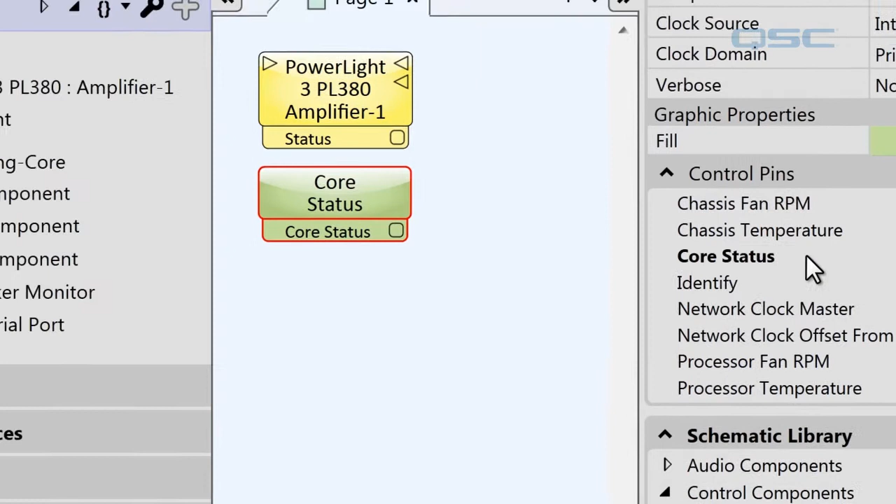For each of them, I'll go to the right side pane, look at the Control Pins window, and activate the Status Control Pin. Now, if you have more than one inventory item that you want to monitor, you may not want to set up a different emailer for every single one. Instead, let's go to the schematic library again, under Control Components, and bring in a status combiner into the schematic.

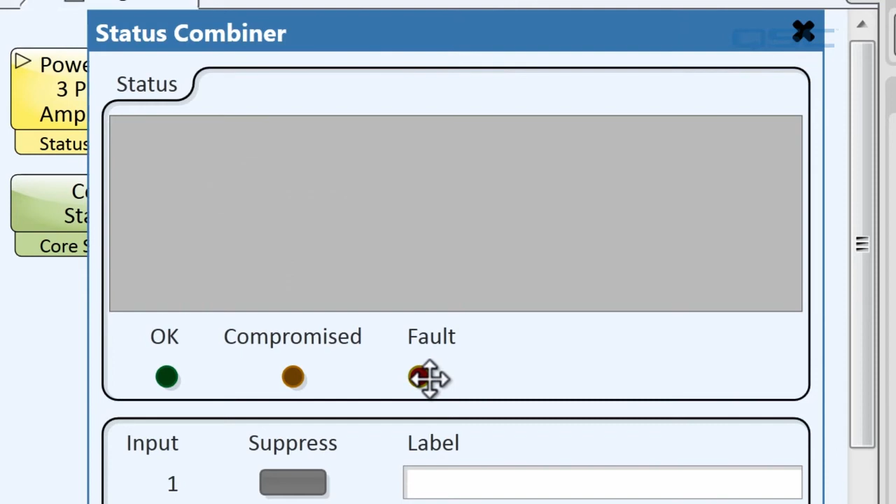You can wire the control pins of any inventory item's status to the status combiner, and it will compile them together to let you know if there's a problem with any of them. Now, if anything goes wrong, this fault LED will light up. Well, I want that LED to trigger the emailer. So let's go to the Control Pins window of the status combiner and activate the fault control pin. Next, we have to create a trigger.

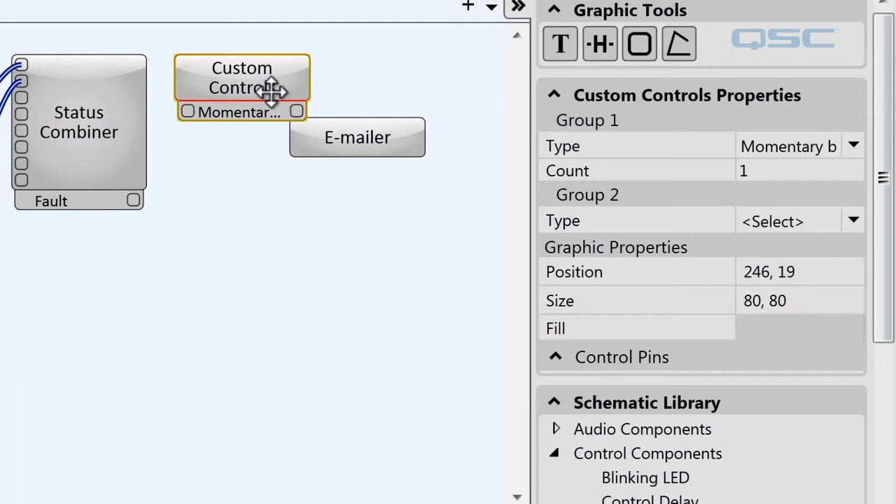So let's pull in a custom controls component, and we'll use it to create one momentary button. That means that the moment that this button is activated, it will send one impulse to whatever it's connected to. Wire the fault control pin to the momentary button. Now, when there's any fault in the system, this button will trigger.

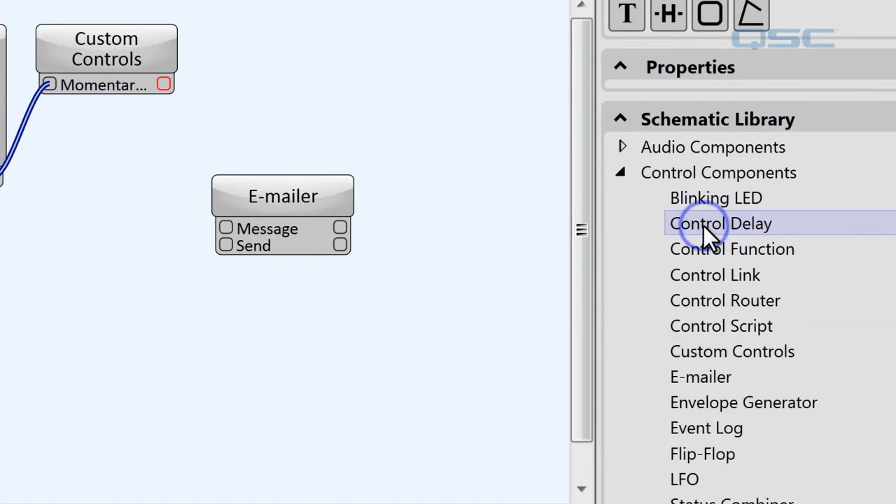Let's go to our emailer component and open up some of its control pins. We want to be able to control the send button, and we also want to edit the message that it sends. We'll wire the trigger from the momentary button to the send button, but before it gets there, I actually want to bring in a control delay, which simply adds a bit of time between when this button is triggered and when it actually fires.

You can adjust it anywhere between 0 and 10 seconds, and the reason I'm doing this is because I want to make sure there's enough time for the system to compile a log event of the failure, because that's what we'll use for the message of the email.

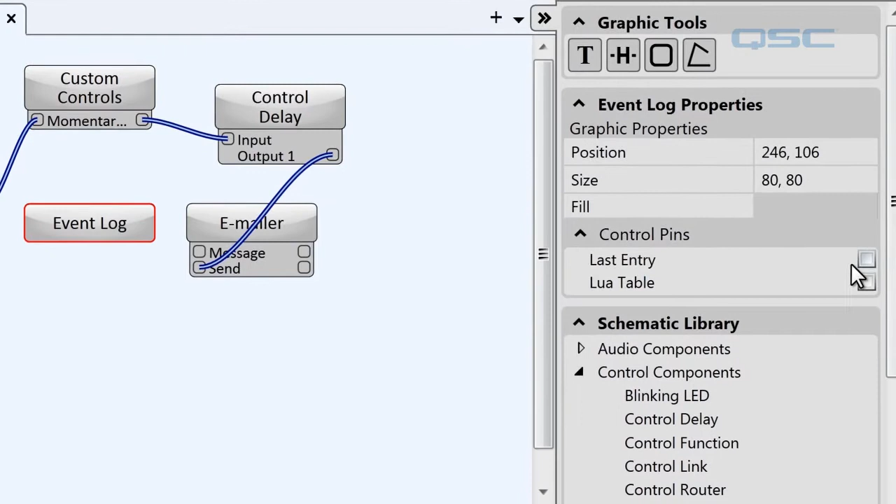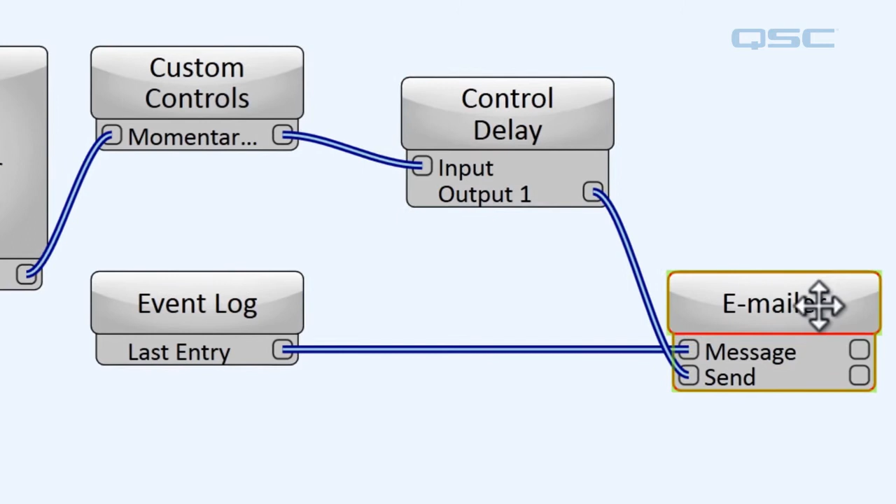Pull in the event log component from the schematic library and activate its last entry control pin. Wire this to the emailer message control pin, and it will use the last created log for the body of your email. If you're unfamiliar with the event log, refresh yourself with what it does by watching our administrator tutorial.

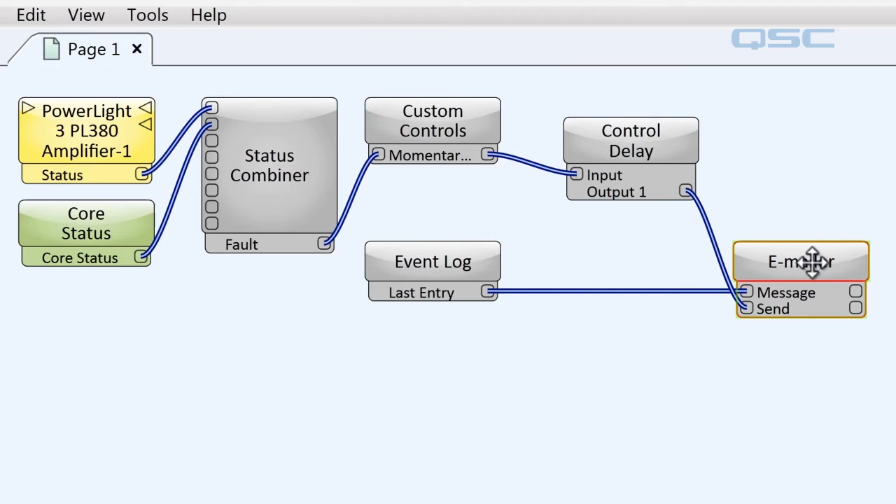So, let's review this entire chain. Your inventory items constantly send their status to a status combiner. If any of them are at a fault, the fault LED will send a signal to this momentary button, which, after a 5-second delay, triggers an email to be sent. The email consists of the last log entry of your event log, which should be the fault in your inventory, and it is sent to whoever you have established here in its control panel.

Let's see this in action. Now, the amplifier I added earlier doesn't actually exist. So when I run this to the core, it's going to report a fault for the status of that amplifier. Then, after 5 seconds, we'll see the emailer start to send its message, and here in my inbox, I'll find the error log. It's just that simple.

We've also built our own customized messages, which are then fed to the message field of the emailer rather than using the last event log. Now feel free to download this project file from qsctraining.com if you want to get a closer look at how we scripted this to work.

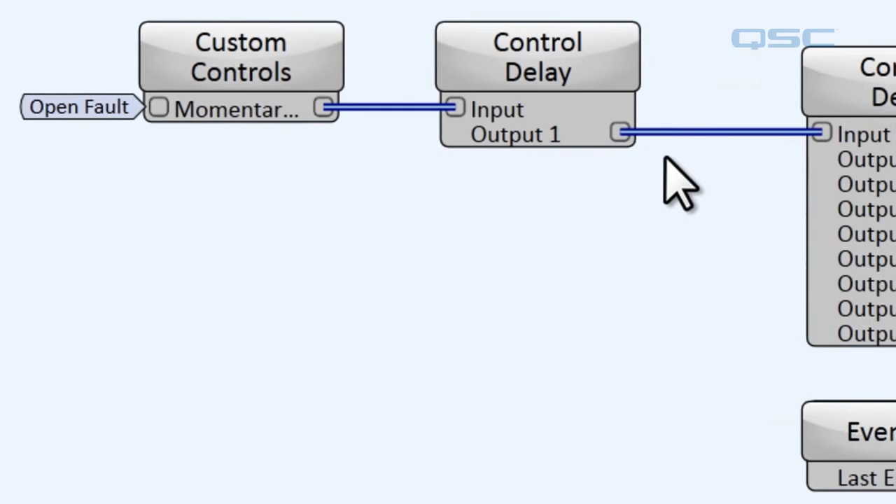Here's another example in which the user could customize the recipients of the email from a UCI. Rather than inputting all the names in one group text field, each recipient receives their own email. In this scenario, a speaker fault triggers a button, which launches a send command to every emailer, which receive their recipient name from the text field of the UCI. This project file is also available to download.

Hopefully, this gives you an idea for the possibilities of using the emailer component and how to keep you or your user connected to the urgent events in the system.